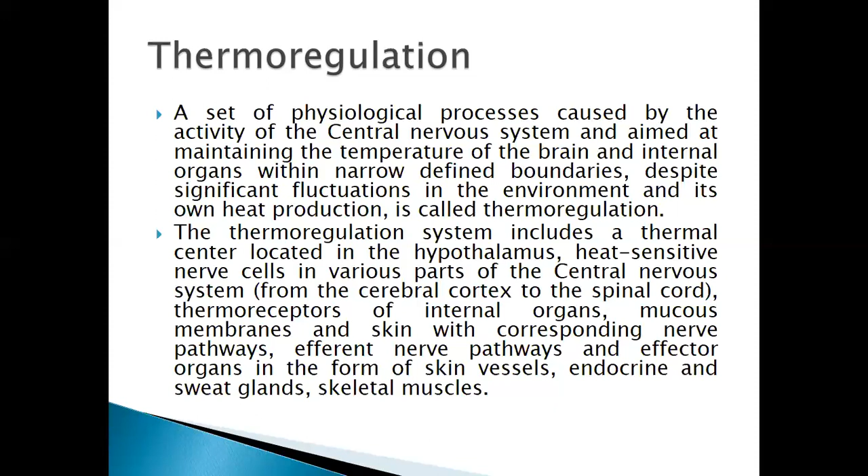The human response to the thermal effects of the environment depends on 7 parameters: air temperature, relative humidity, average radiation temperature of the medium, speed of air movement, the insulating capacity of the clothing, physical activity, and the last one is time.

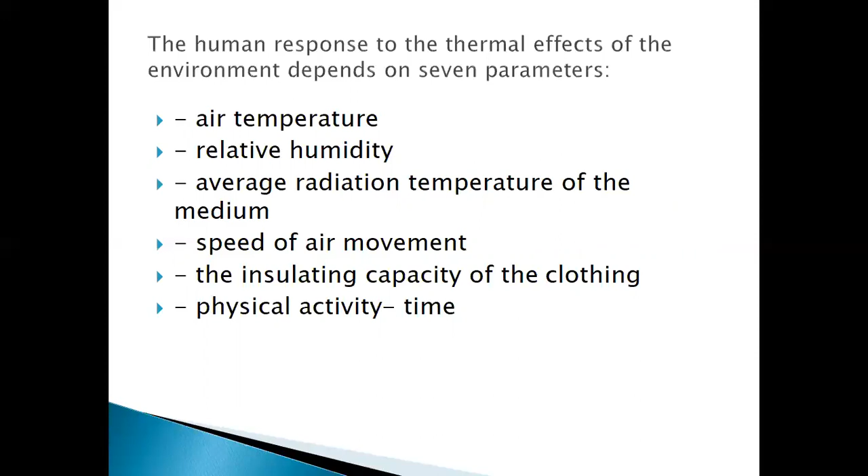In the human body, as a result of biochemical processes, there is a continuous release of heat. Simultaneously with heat generation in the body, there is a continuous heat transfer to the environment in an amount that ensures the preservation of body temperature at a constant level, an average of plus 36.5 degrees.

The return of heat by the human body to the environment occurs as follows: first, radiation of heat from the surface of the body, or radiation, 45%. The removal of heat by the air surrounding the surface of the body, so-called convection, 30%. Evaporation of moisture from the surface of the body, lungs and respiratory tract, 25%.

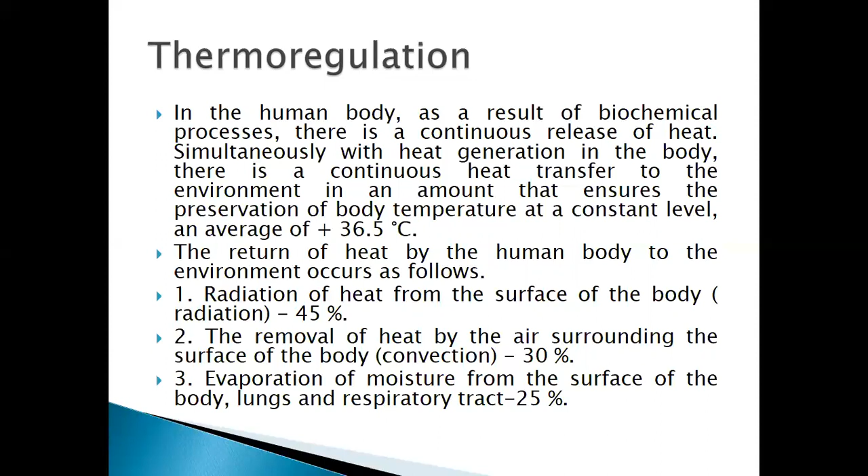The ratio between different types of heat output may vary depending on the state of meteorological conditions. For example, if the air temperature is more than plus 35 degrees, heat radiation almost completely stops. When there is insufficient air movement, heat transfer by convection decreases, and evaporation from the body surface depends on the relative humidity.

A certain combination of microclimate parameters is necessary for a person's normal well-being. The limits of the combined influence of various combinations of temperature, humidity, and air velocity that are favorable and don't cause disturbing thermal sensations, or the comfort zone, are shown here in the table, which is called optimal norms of microclimate parameters of industrial premises.

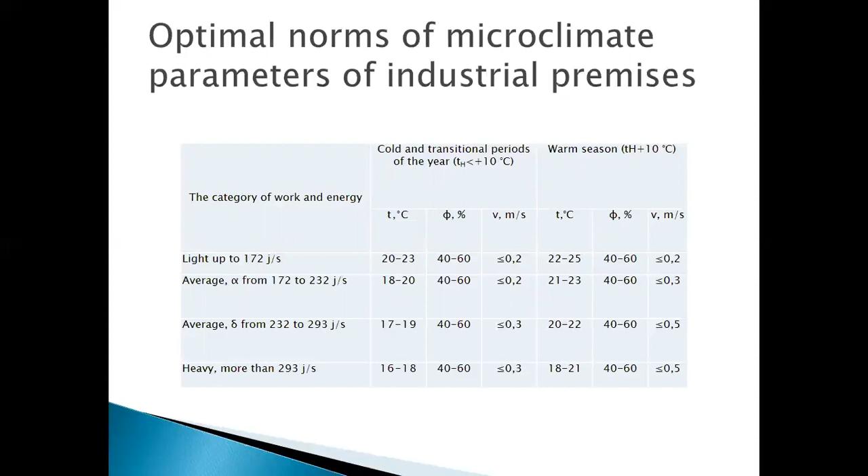Let's talk about measurements. Temperature measurement: the air temperature in working rooms depends on the amount of heat entering the room from heat sources by convection, the amount of heat leaving this room through fences and various open openings, and the dilution of its supply by external air.

The air temperature should be measured at various points in the work area: at permanent jobs, at several points in the zone of the most frequent stay of workers, in the areas of maintenance and control of equipment operation, and at various distances from the heat source and from the openings through which the outside air enters.

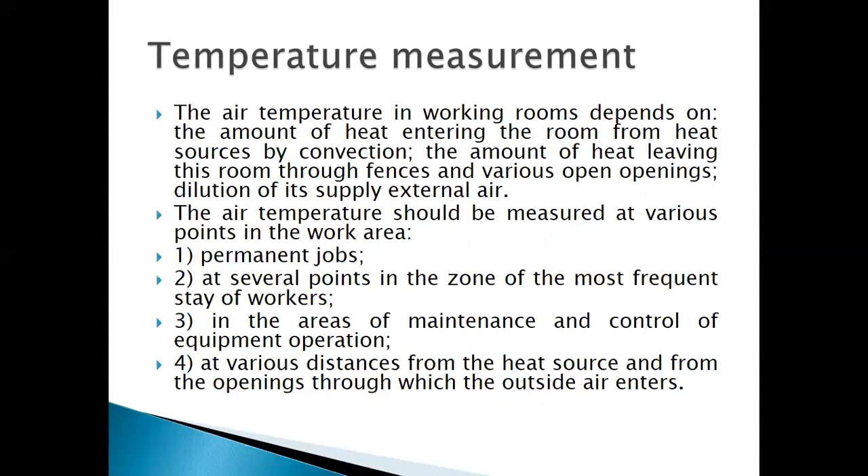Measurement at work sites and in the work area is carried out at a height of 1.3 to 1.5 meters from the work site. And if the temperature changes significantly, at the height of the additional feet, which is 0.2 to 0.3 meters.

The most common thermometers for measuring room temperature are mercury and alcohol. When measuring temperature above 0 degrees, use mercury, and for temperature below 0 degrees, use alcohol. Mercury freezes at temperatures above 39 degrees below zero, and alcohol doesn't freeze even at temperatures less than 100 degrees below zero.

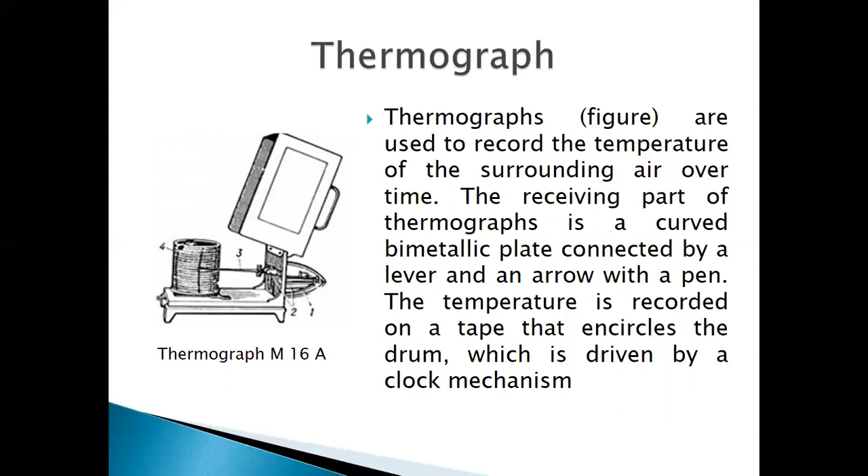The second parameter is humidity. Humidity fluctuates less sharply and often, so it is measured only in the work area at the main workplaces. In areas where water is used in the process, air humidity is studied in more detail.

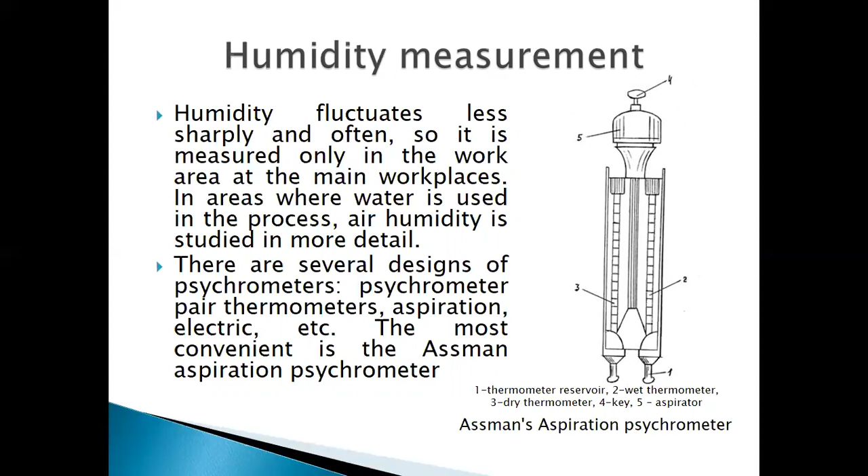There are several designs of psychrometers: psychrometer pair thermometers, aspiration, electric, etc. The most convenient is the Assman aspiration psychrometer, which you can see in the picture. Assman's aspiration psychrometer consists of thermometer reservoir, wet and dry thermometers, key, and aspirator.

The next equipment is a hygrometer. Hygrometers are used for direct determination of relative humidity. Hair hygrometers are based on the ability of a human hair, due to its hygroscopicity, to change linear dimensions. A hair hygrometer is a frame on which a specially processed fat-free human hair is stretched vertically, reinforced with one end on a metal frame and the other on the axis of the arrow. As a result of changing the linear size of the hair, the arrow is deflected, showing the relative humidity.

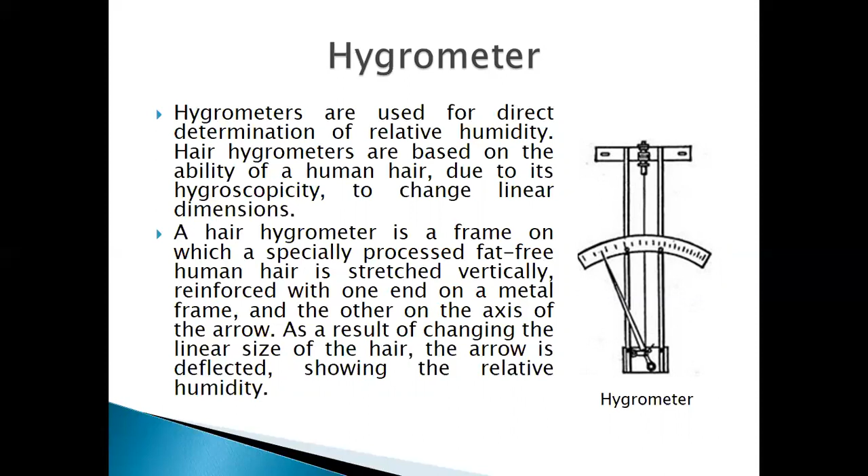The next parameter of the microclimate is air velocity. Measurement of air velocity is performed by anemometers, such as winged ASO3, designed to measure the airflow rate up to 6 meters per second, and cup anemometers, MS13, designed to measure the flow rate up to 20 meters per second.

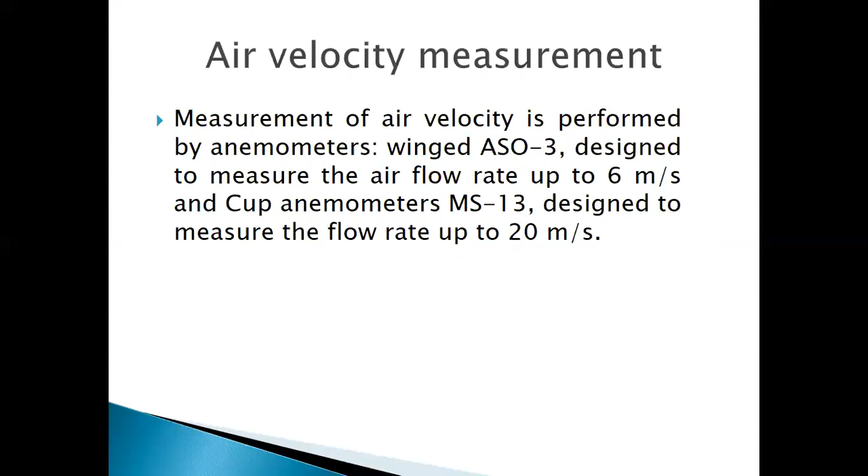Let's talk about the wing anemometer. The wing anemometer should be positioned with the impeller strictly towards the airflow. The rotation of the impeller is transmitted by means of a worm to the counting mechanism. The wing anemometer consists of a vane and a counting mechanism, which has 3 arrows. A large arrow counts units and tens, 2 small ones count hundreds and thousands of units.

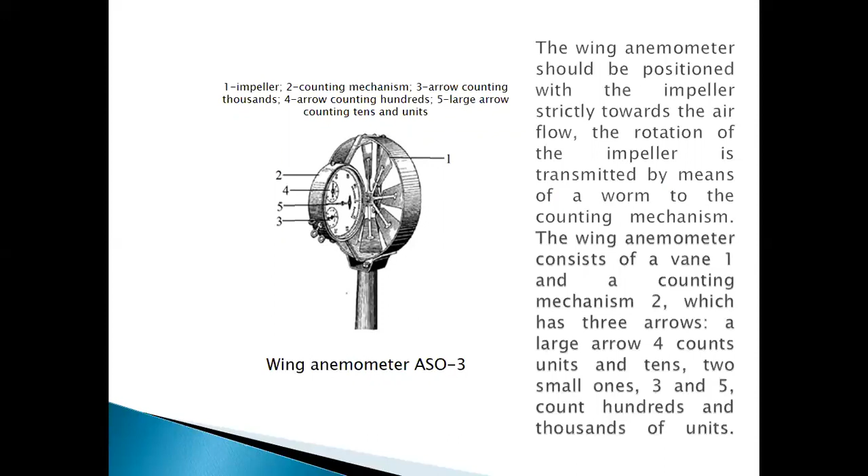Cup anemometer is structurally different from a winged one in that the receiver of the device is 4 hemispherical cups. When measuring, this anemometer should be positioned vertically. The order for measuring airspeed is as follows: first, remove the initial reports for all scales, thousands, hundreds, tens, and units. After that, the anemometer is placed in the airstream, the counting mechanism is turned on, and the time is recorded.

Anemometers operate on the principle of an air tachometer, counting the speed of the wind receiver at a speed proportional to the speed of the airflow.

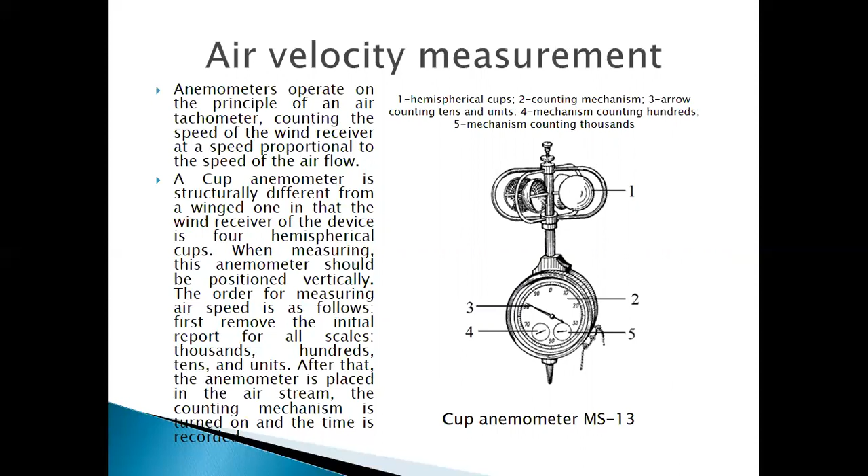How to measure air velocity? Firstly, turn on the device, and after the specified time from 30 to 100 seconds, the counting mechanism is turned off and the final report is taken for scale. Then determine the number of divisions per second. The resulting number, m, is proportional to the flow rate. Therefore, the value of this m determines the speed of air movement using the graph attached to each device. To get reliable data, you have to make from 3 to 5 measurements, to be clear.

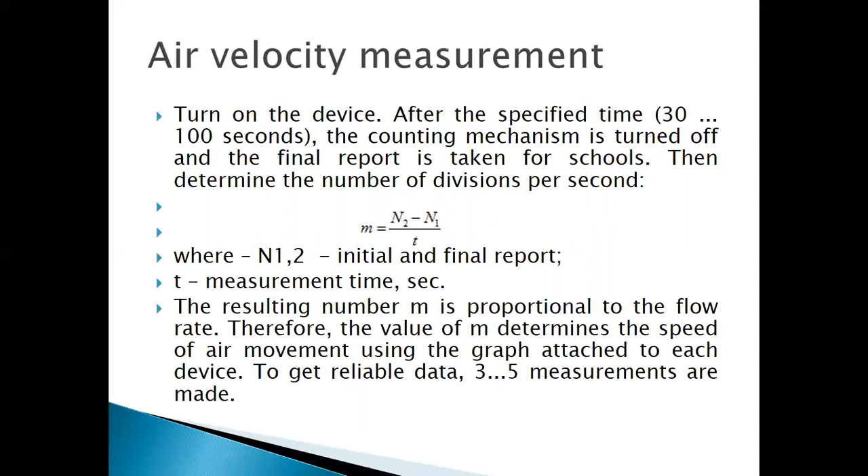Also nowadays you can use a multifunctional environmental parameter meter, because with this device you can measure temperature, relative humidity, airflow velocity, pressure, and carbon dioxide concentrations in one device.

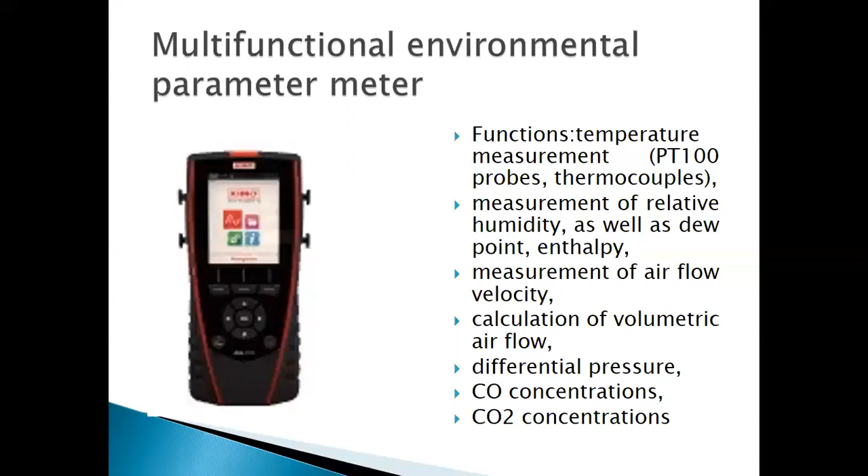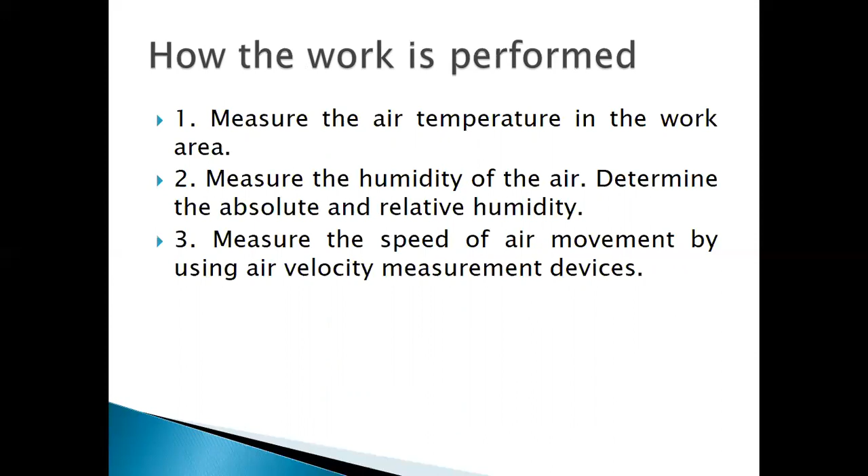How is the work performed? Firstly, measure the air temperature in the work area with the thermometers. Secondly, measure the humidity of the air, and determine the absolute and relative humidity. And measure the speed of air movement by using air velocity measurement devices such as anemometers.